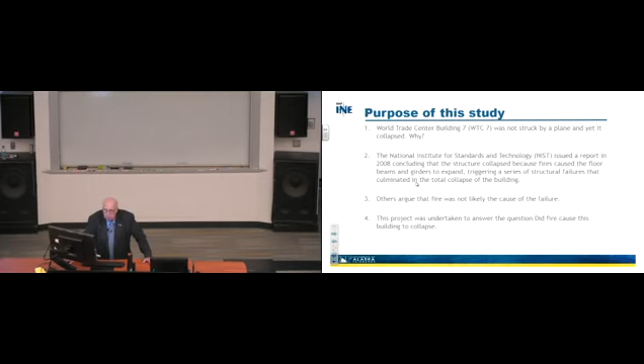More importantly, I want to let you know that since it's a progress report, this is not a traditional slideshow where I have just bullet points. There's some here where I have quite a bit of prose. And the idea is that this will go out and be available for you to read additional information if you so choose. We're going to be transparent. We welcome any questions. We're making everything that we have done available so that we make sure that everything is scientifically tested. So we'll have a peer review committee to make sure that we've met all those standards.

The methodology. Today, I want to share that with you. We assembled first the available documents, erection drawings, etc. that were available for this building. Traditionally, I would have liked to have had the opportunity to go in and pick up all the pieces of the puzzle and put it back together like you would a typical airplane. They did not exist. It wasn't available. So we've done the best we can with all the available documents, and basically what we did is create an AutoCAD drawing that we used to create a virtual geometry of this 47-story building. Basically, in digital form, you should be able to see every piece, every member, and it should look exactly like what was used in that structure. And so that's what we did.

We then prepared an Abaqus nonlinear computer model for the connections and for the framing of this building. That is a fairly sophisticated finite element program that enables you to look in detail at how something is going to respond under a set of conditions. I know that I have a mixed audience here. I'll try to keep it as simple as I can. At the same time, I need to share with you some pieces of complexity so those in the technical arena have an appreciation for the fact that they did look at this in a fairly sophisticated way. There's several things here that I haven't talked about. We have SAP2000, the current edition, version 18, and Abaqus, and we use that to look at the framing.

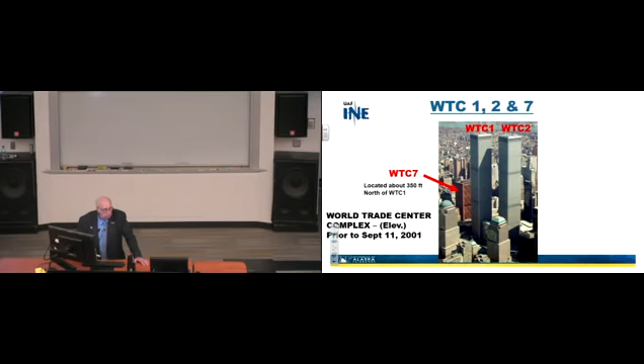In plan view, to give you a different perspective, here's the north arrow. So the northeast corner is where we're going to spend our life in the next hour, in that northeast corner. That's the farthest way from that arrow of that building. That's plan view. This study is really about why it came down. This building was not struck by a plane, yet it collapsed. That's almost an overwhelming thought if you stop to think about it for a moment.

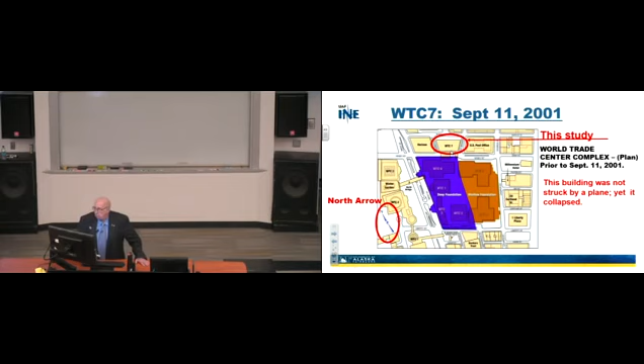If we're looking at it from an elevation view and try to take a look at the various sides of this building and what it may have looked like, here's the north elevation. When I talk about the north elevation, I'm really talking about this elevation here, the width. Notice that it's wider trapezoidally than this south elevation. So the building is not symmetric, for God's sake. There's all kinds of issues, but this makes it really interesting. So here's that width. Here is the south. Notice it's not as wide. And then here is the west elevation and the east elevation.

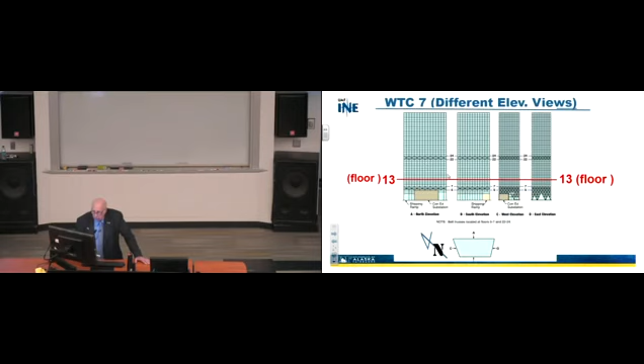Now within that context, here's floor 13, because we're going to spend a lot of time there, so you'll have some understanding of what the heck's going on in that area. Here are these perimeter trusses I was telling you about. That's at floor 5 and 7 and 24 and 22. Those trusses are resisting lateral loads. And in the plan view, you see A, C, D, and so forth. Down below here is the Con Edison substation, shipping, all the things going on down there. So that's what it's built on. That's what we're dealing with. Way more complex than that. That's the perimeter view, not the internal view.

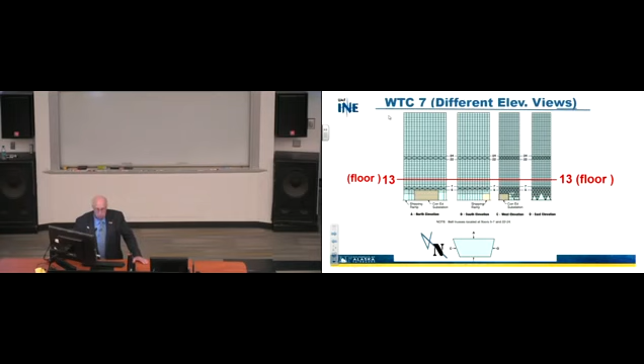Oh my God, here's the internal view. All of a sudden, we see that there's a plan view, there's frame, there's structural systems everywhere. These little hexagons are the columns, supporting vertical loads. These other things are either girders or beams. The main core carrying members, like this right here, that's a girder. These things framing into it are beams. So this girder is A2001 we're going to talk about. We're going to talk about girder A2002. This is column 79, where we're going to spend quite a bit of time this afternoon.

This is a beam on the exterior, G3005, and it's important because it has to do with the lateral bracing of this whole system. I turned these things into circles because they could have been hexagons, but I wanted to bring them out so we could pay attention to them. That's column 44, column 79, column 80, and column 81, and then column 76. So our life in plan view is going to be in that area.

Because column 79, just to give you a snapshot of where we're heading, is basically what they said failed to bring this building down. So we're going to go there and take a look at it, and we're going to look at it intensively.

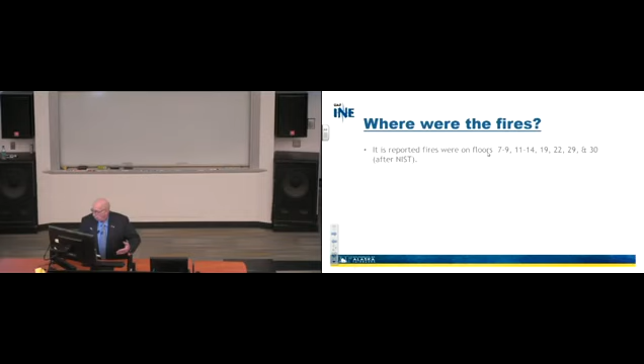So what were these crazy fires? I should have had a slide in here, I suppose. I thought I did. They started about when World Trade Center 1 and 2 actually got hit. That's in the morning. And then later in the afternoon, World Trade Center 7 came down, hours later. And they had fires that were reported having come from World Trade Center 1, coming through the windows and so forth.

And they were on floors 7 to 9, 11 to 14, 19, 22, 29, and 30. And this is after the NIST report, where they reported those fires. 1 hour before collapse, it's reported that there weren't any fires on floors 3, 5, and 7. So there were fires up in here. You have to ask yourself a lot of questions, and we don't always have answers.

Okay, so where's the combustibility? This is a steel structure. So what actually was going on in this building? And we'll get there shortly. Okay, so did WTC 7 collapse from fires? Our study shows the fire was not the cause. Now, I'm not going to tell you about what did it. I'm just going to tell you that it wasn't that.

What I am going to do, maybe not today so much, but a little bit later, when we look at the progressive collapse, is tell you what had to happen for this thing to come down. Okay, that we will be able to tell you. This contradicts findings presented by NIST. Our presentation will address this issue. We will discuss the NIST approach and our approach and findings.

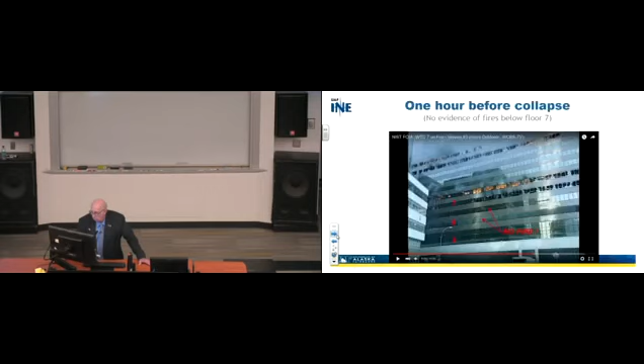The beams didn't get that hot. When we take a look at the beams, they reach 500 degrees C, and the column temperatures only reach 300 degrees C. That's significant, because there's a point where the steel begins to decrease in strength and modulus when you reach a certain elevated temperature. So the first thing I would have thought is, the columns obviously got really hot, lost strength, and we would have ended up losing the building.

Nobody seems to think that ever happened. Furthermore, there weren't a lot of combustibles in there. So no east exterior wall deformation occurred due to expansion of beams. That's their assumption. In K3004, C3004, and so on.

Where's that at? Just to kind of give you a heads up on what I'm talking about, that's along this line. Okay? Those are the lines of these beams right here. You see these beams? They're going into these girders. They're framing in. Am I making myself clear? So in plan view, I've got a beam going from this outer edge to that girder. And those are beams. And those are the numbers, 3004 and so forth, that we're talking about. Okay?

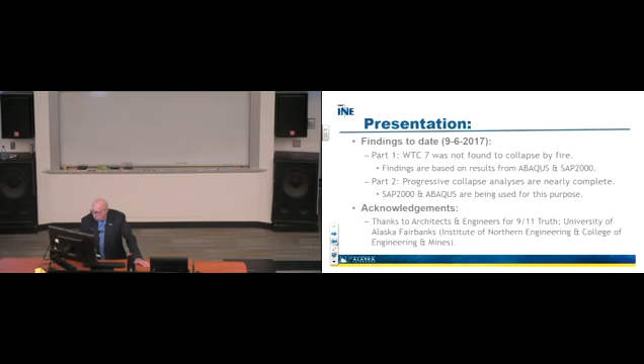The bolts fastening girder A2001 to its seat at column 44 and 79 were broken. That's significant. So let's go back here. Here's 44 and there's 79. And they're saying the connection of this girder to those columns, the seat connection, did not function during that period and therefore lost support, lateral support, and produced a problem. Okay?

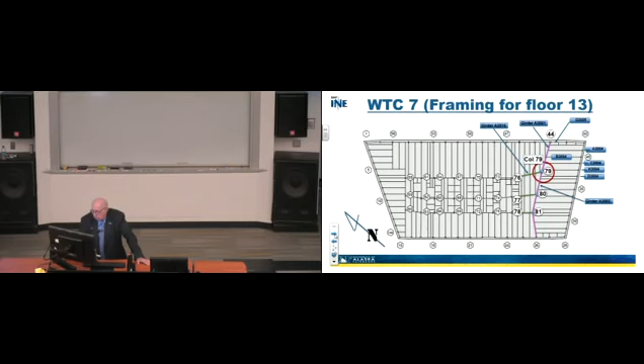So, going backwards here or something. Hang on a second. I'm going crazy. Too much fun. All right.

So they've lost those supports. So that means those two columns no longer have lateral support at that level, and did they possibly have a problem later? The floor loading was 88 pounds per square foot. The NIST computer model results were based on exterior columns being fixed in every direction. That's kind of a significant thought.

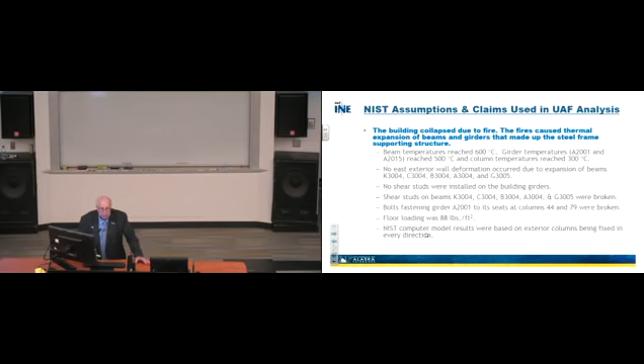All right, so now, looking at their plans, this came out of the NIST report on page 343, 2008. And so this gives you a geometry of, that's a 44-foot length from 44 to 79. 44 foot, that's a girder length. 44 foot, you know, that's longer than this, for sure. You see what I'm saying? That's not small. This is a huge building, 600 feet across. I mean, for God's sake.

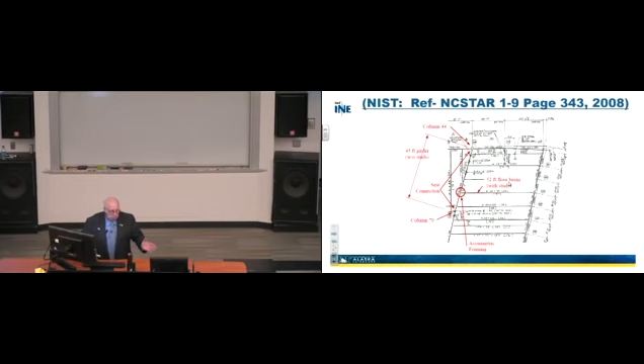So here is 50-some feet here, 54 feet across. This is our exterior wall. I'm in the northeast corner of this building. Is that clear to everybody? That here we are in that trapezoid world. Notice that there's asymmetric framing. These beams, for God's sake, are 52 feet long. That's not small. I mean, where in the world do you see that kind of stuff?

So anyway, in their view, by taking a heat model, putting fire on it and then subjecting their finite element model to an increase in temperature, they got a thermal expansion. Their thermal expansion looks like this. So that actually is this girder right here, A2001. And it expanded, and they said it pushed off of this bearing seat, and thereby they lost support. And then these cascaded downward, okay?

So that's basically what we're talking about here. There's that girder I'm talking about. There's that exterior. And here are lateral supports for this beam system through here. So what were their conclusions? First of all, fire-induced weakening of critical columns did not cause WTC7 to collapse. Okay, didn't get hot enough. They're saying that 300 degrees is not hot enough.

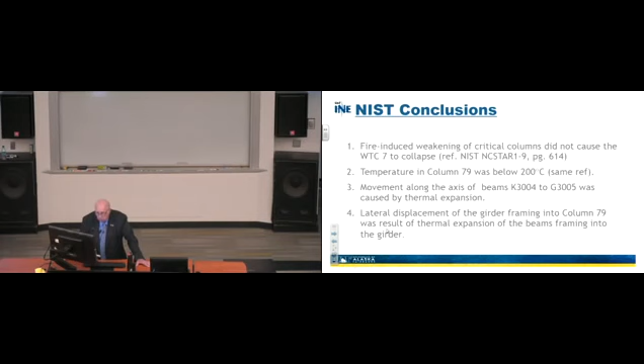No argument. Temperature in column 79 was below 200 degrees C. I think that's true. I might have to look that up as a reference again, but I'm pretty sure that's about what it was. Movement along the axes of beams K3004 to G3005 was caused by thermal expansion. Then the lateral displacement of the girder framing into column 79 was a result of thermal expansion of the beams framing into the girder.

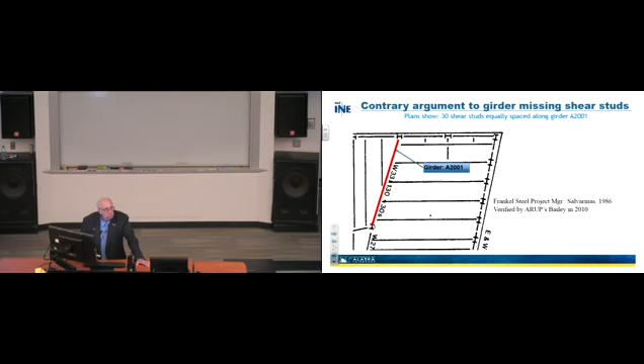All we're saying here is when these heated up, they got longer. This was fixed, so they're all going to move to the left. That means they move what direction? West. And in moving so far west, what happens? Well, they're going to try to move, and is there enough space to hold them in place? That's what their argument is, right? That's the key right there. And that's what it looked like. Bang, bang, bang, bang, right? This thing bowed outward. And so this moved and that moved.

Okay, this is the cascade issue that they said. So the buckling initiated here at this place right here, at floor 9. And then all these issues mean that they lost lateral support of that column. This is column 79, by the way, the one I'm talking about, the one we've been focusing on.

That column 79, okay, so it doesn't have any lateral support, and because of that length, it cannot take nearly as much load as it was designed for. And so consequently, the vertical support and lateral restraint is in the north only, and so therefore there's a huge problem.

And then there's full lateral support up here, and then there's partial lateral support down below. Okay, so that's down here at the very bottom in the kind of Edison area. Those are all laterally supported. But between this zone, they said, it went away.

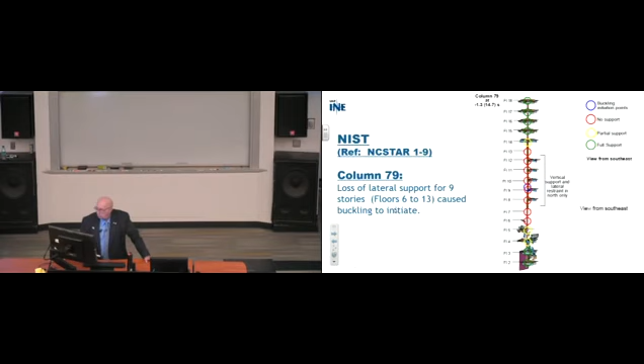So the loss of lateral support for 9 stories, floors 6 to 13, caused buckling to initiate, which means you lost it. Okay, is that clear? Everybody clear about what I'm saying here?

Okay, now let's take a look at their model for a moment. Their model is, this is looking at a partial of that trapezoid. Down here, partial, we're seeing a partial of it. This is the northeast corner. There's column 79. And in that blue, it's kind of significant.

That blue is where they put, at every place a beam and a girder come together, a column to girder goes together, a beam to all these kind of things, there's a connection that's on the drawings that says, here's how you will build it. You bolt it together, you make it do whatever you want it to do, and that's the way it was supposed to be built.

Remember that the north arrow is here. This is the west side. The east side is to my right. And so, and this is after NIST, the area of floor where connections were modeled on floors 8 to 14, and that's in the blue area. Over here, that wasn't done.

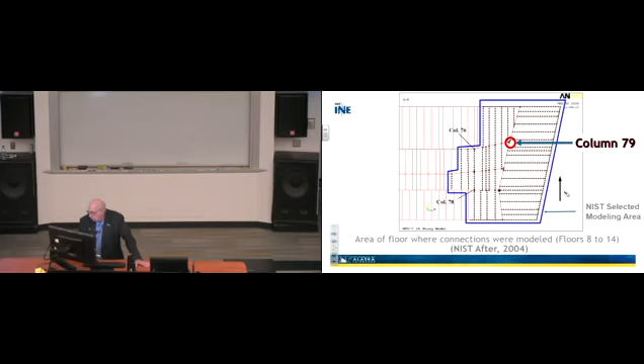So, there's column 79. Here's the area outside of the thing. And so now let's take a look. Outside the selected area, connection failures were not modeled. NIST used fixed or pin connections.

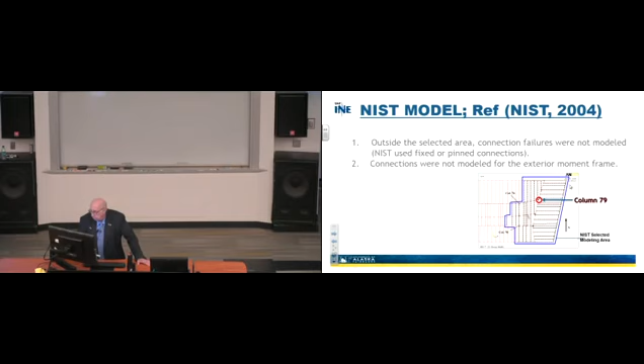So automatically, you have to ask yourself the question, do they have the same stiffness as what you were modeling here more accurately? And the corresponding question is, does it have an influence? Does it change how the system is going to respond? And so the connections were not modeled for the exterior frame, and the columns themselves were treated as fixed.

Also in the NIST documentation, page 525, 2008, a girder was considered to have lost vertical support when its web was no longer supported by the bearing seat. That means if there's loss of bearing support on A2001 coming into column 79, then it's lost. The bearing seat at column 79 was 11 inches wide. Thus, when the girder end at column 79 had been pushed laterally at least 5.5 inches, the web was no longer supported by that bearing seat.

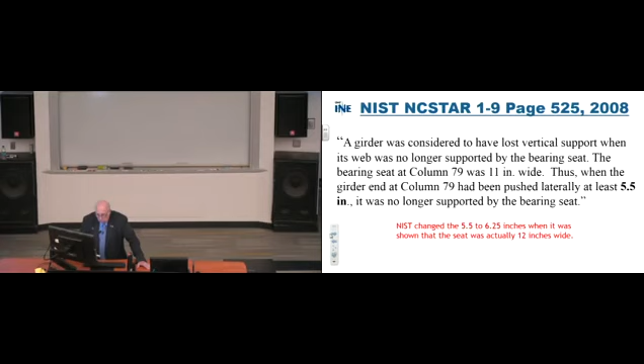NIST changed that 5.5 inches to 6.25 inches when it was showing that the seat was actually 12 inches wide. So that's kind of something to think about. Why did that happen? And that was later.

So some of the NIST results are the following. Pardon me if I'm boring you, but this is a passion for me. Let's just kind of take a look at what actually happened.

Here's the NIST model. And remember those connections, okay, so we're looking at this not from the south, we're looking at from the north, right? Isn't that right, Zilly? Or am I looking from the south? Yeah, that's the north face of the building. Yeah, exactly, north face of the building.

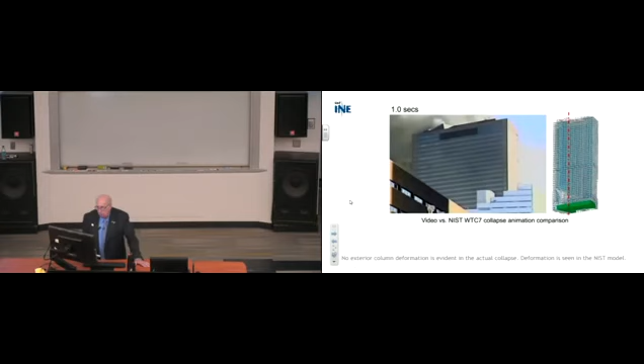So here's a penthouse up here, and here you're going to see two different situations because of the connections issue. Now let's see what this thing, and this is a real building. So here's their model. This is their progressive collapse, which I'm not going to show you ours yet. And here is this one, okay? And here is taking a look at the failure. Actually, that did occur that day.

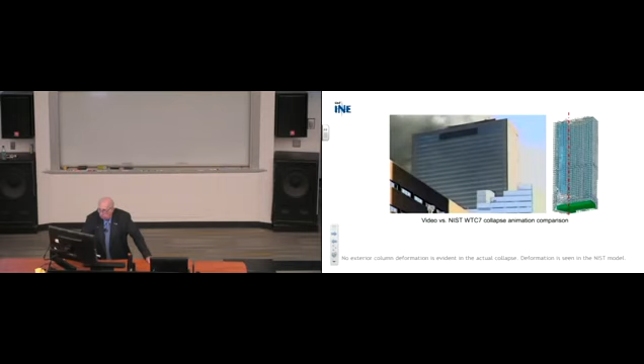So one has to ask themselves, is that the same thing? Is that the same building? It looks like it behaves in an interesting sort of way. Okay, so anyway, let's go on.

Here's the NIST model we were just looking at. And here's the other side, flipped, showing where that modeling was actually done. This is column 76, 78, and 79 is in here. So they were looking at this finite element progressive model they were using to look at that.

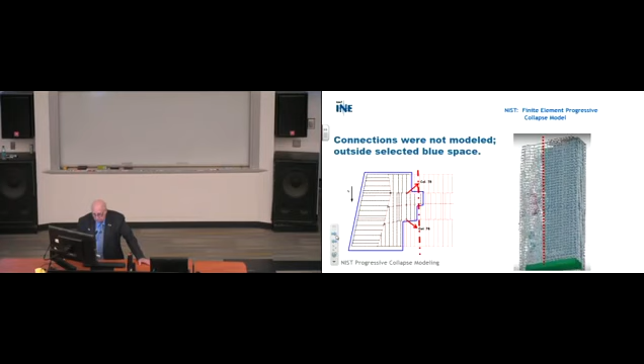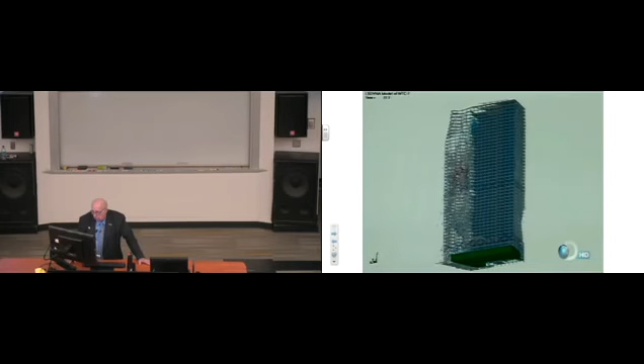I suppose we could even look at it from a different perspective. And there it is again. This is what they're doing. You have to ask yourself the question, though, why is it so much different on one side than the other? You see what I'm saying?

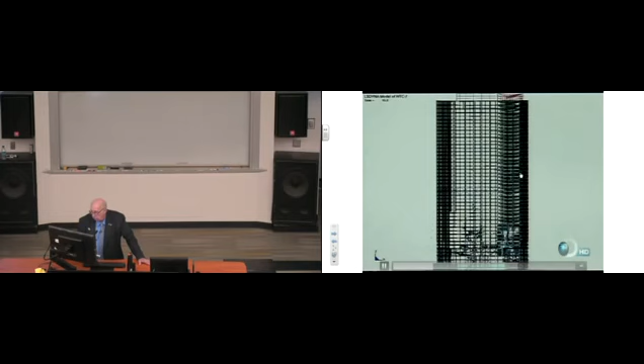And here's things that, because of some damage that came in from the debris falling through the windows and stuff, they're accounting for some of that. Anyway, all right, so let's talk about UAF for a moment.

Analysis of the NIST collapse initiation, hypothesis, and propagation claims is really what we're about to embark upon—how valid is some of this stuff from a science point of view.

So UAF's analysis of the NIST collapse initiation, hypothesis, and propagation: we created a solid model in Abaqus of the structural members in the northeast corner of the 13th floor of WTC 7, and a finite element analysis was performed to replicate the results claimed in the NIST WTC 7 report—that girder A2001 was pushed or rocked off its seats at columns 44 and 79 to initiate the collapse of the building.

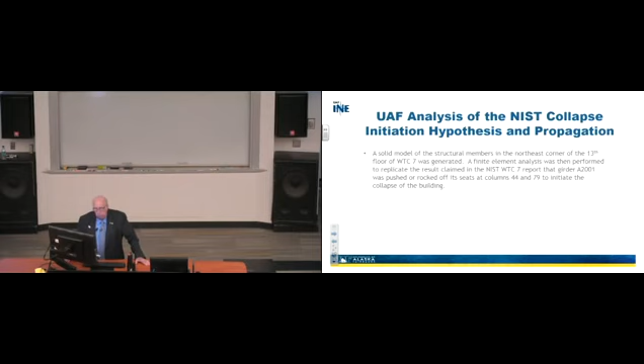So what we're going to do is create part of a finite element model, and we're going to be really conservative—we're going to force things to happen that's worse than the real world, okay? In so doing, if we can't force failure, then it couldn't have happened. Are you with me on this point?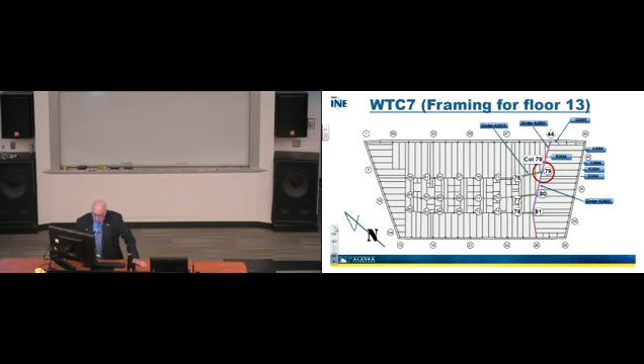And this is what that model looks like before it gets run. So we don't have the entire floor system here—we do, by the way, have the entire floor system, but for this analysis, to evaluate what's going on right here at column 79, that girder, this condition, we need to look at the boundary conditions to force that condition to be absolutely the worst possible.

Okay, we did that. So this is the beginning—you'll notice everything's zero, the stresses are all zero, we haven't put the temperature on it yet. Okay, this is the column that we're talking about.

This column 79—this is really significant, by the way, because column 79, if you look at it, do you know what I'm talking about when I say a W shape? A W shape looks like an H, and that's what we're looking at right here. That's what that column was made out of.

It's a W14 by 730 standard structural shape. What that means is it's 14 inches deep, weighs 730 pounds per lineal foot. That's a chunk of change.

Now within that context, what they did is they built side plates on it, and they closed that box. They closed it so it has structural integrity, resisting twist—significant. But those edges, those 2 inches by 26 inches buildup, mean there's a lip on each side of this, and they're going to literally put on that flange the bearing plate.

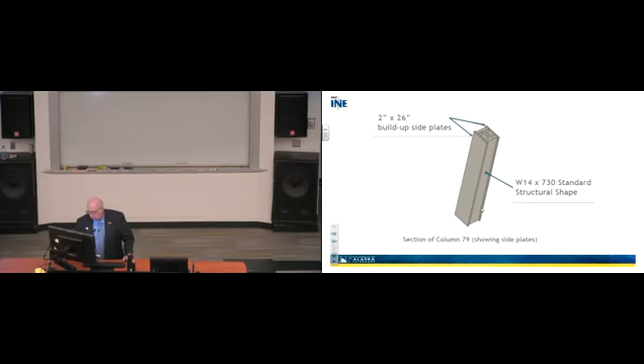Okay, are you following me? We're going to turn—that column stays vertical, but we're going to put a bearing plate in here. Okay, so there's what it starts looking like. We're looking at it right now—plan view, A2001, going over to 44, and there's a connection to column 79.

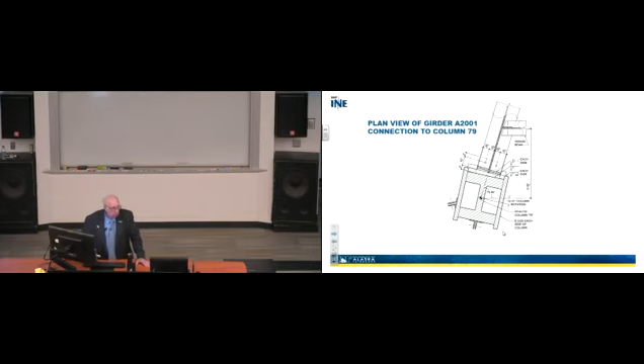And see that lip right here? Those lips? Okay, got it? Understand? So if this thing starts moving, and it's getting shoved—if it's getting shoved to the west, which is to my left, probably your left too—then it can't get past that thing, unless something happens or breaks, right? Does that make sense?

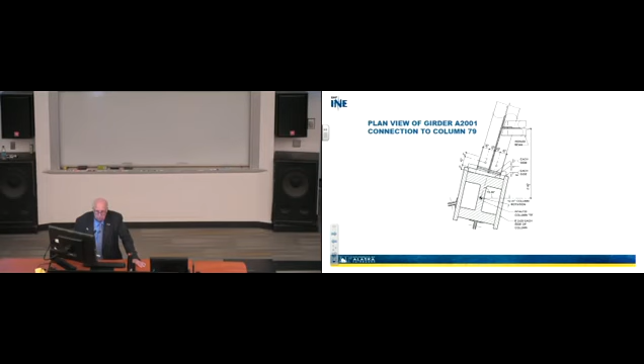And there it gets shoved. So the plan view of A2001 moving across its bearing seat at column 79 due to thermal expansion of the beams framing into the girder from the east is here, and it gets shoved. Note that picture illustrates that A2001 is trapped by that column side plate, and it's not possible for it to move the girder beyond the seat claimed by NIST.

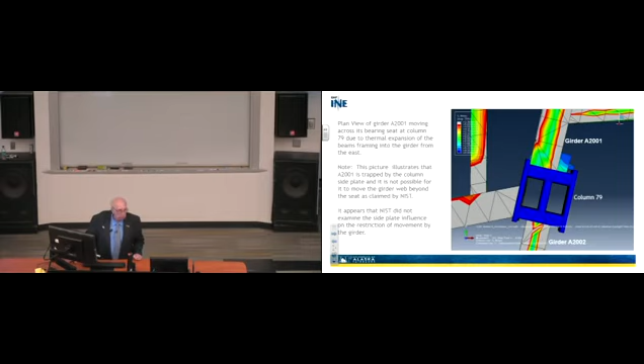They're saying it got shoved off and it fell down. The fact of the matter is they didn't have the side plates on it. They weren't there in their model, so they wouldn't have found that. But yet they did exist in the structure, in reality. It appears that NIST did not examine the side plate influence on the restriction of movement by that girder.

Okay, so now let's take a look at what else we looked at. And this is just part of the puzzle, because we've been playing this game for two years, so this is just a few weeks of stuff. So the model shows the influence of the thermal expansion at the northeast corner of floor 13. Here we are. There's column 79, column 44, and there's the northeast corner. And here are the beams framing into that girder system.

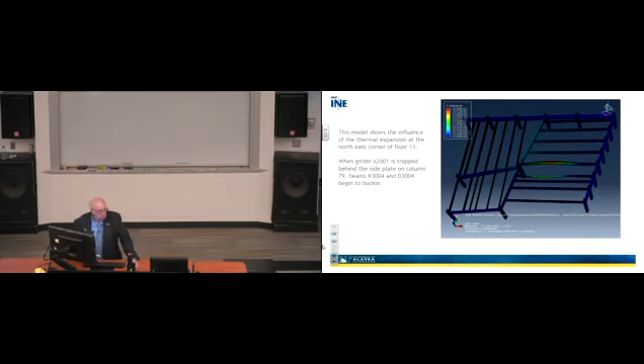So when girder A2001 is trapped behind the side plate on column 79, these beams begin to buckle. In other words, they can't go in here. So it's heating up, it's pushing, and they can't stand the amount of load axially that's been imposed upon it. And so they begin to try to displace out of the way and relieve their states of stress. Are you following what I'm saying here?

So fundamentally, that happens. This is out of the NIST WTC 7 report, figure 8-22, which is showing basically concrete slab, metal deck, all that kind of stuff. Exterior columns out here, and this is basically column 79, column 44, how that column is, and the girder here, and so forth, okay?

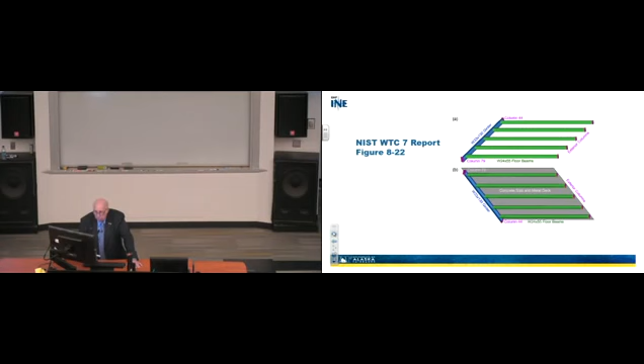And here's what begins to happen on the exterior columns according to their stuff, okay? And so they did not have those side plates in there.

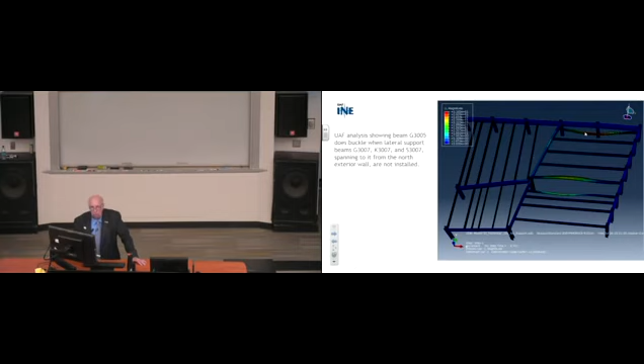So that means that something could happen, and there it is. So UAF analysis showing beam G3005 does buckle when lateral support beams 3007 spanning to it from the north exterior wall are not installed. Okay? So if those are not installed, it's going to buckle.

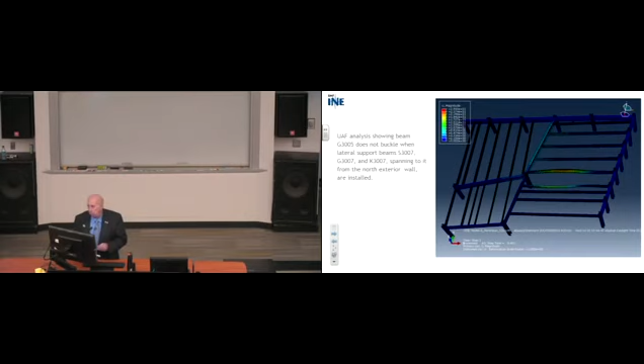So the UAF analysis also shows that that girder does not buckle when you have them in. There's a huge difference between those two thoughts and what that might mean to the behavior of this system, spanning to it from the north exterior wall as we see here, okay? So is everybody getting a mental picture of this building? You should be almost getting an intimate view of what we've been living with in this picture, okay?

Let's take a moment, take a breath of air. Section view of actual configuration of girder A2001 at column 79 from the Frankel 1985 drawing 9114, showing there's partial height stiffeners in here.

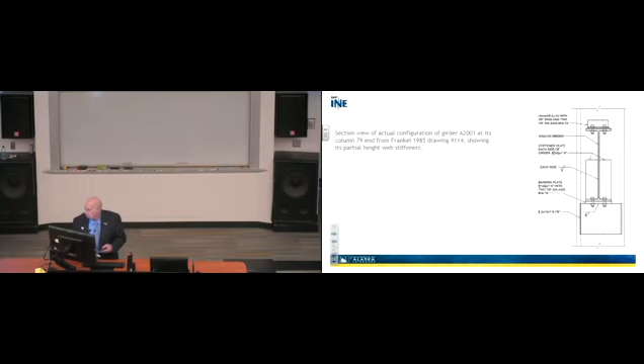Now, folks, let me just absolutely tell you, this is critical. Those stiffeners prevent this web from buckling. But more than that, it prevents these flanges from getting overstressed and having a flexural problem. If they're there. If they're there. But NIST did not include them.

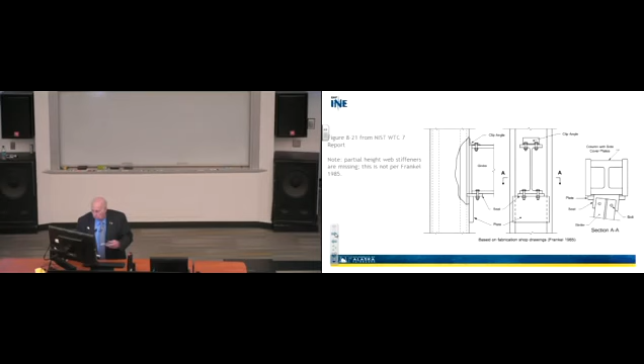So, partial height webs are missing. That means there are some issues here that literally affect the behavior of this system. So figure 8-23, finite element analysis from the NIST WTC 7 report, note partial web stiffeners are missing.

So the behavior of this interaction between column 79, A2001, column 44, the beams to the girder, the moving of the girder on that bearing stiffener, I mean on the base plate.

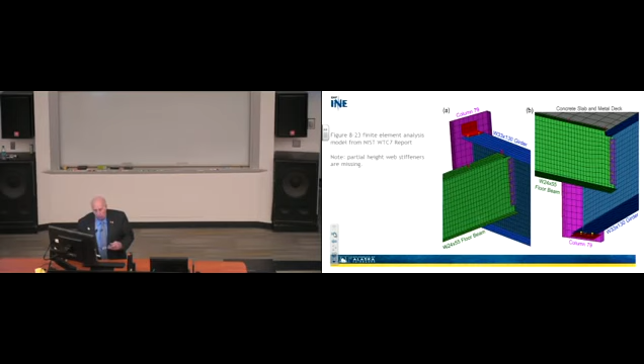Now remember, they didn't have the base. They didn't have the side plates. They didn't have the stiffeners, and all of those things are going to give you a huge added resistance to anything going on here. And in spite of that, I'm going to share with you some other things that make it quite interesting. So here we go. There's what happens if you don't have any side plates.

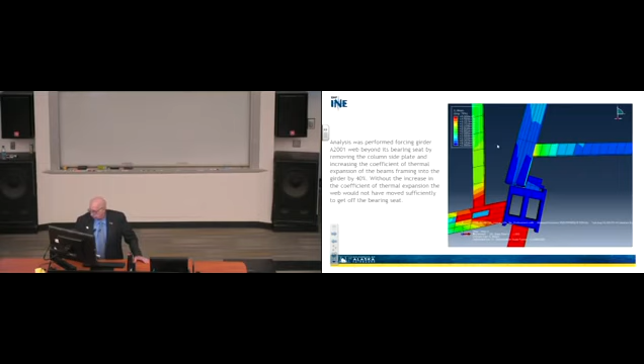So the analysis was performed forcing girder A2001 beyond its bearing seat by removing the column side plate, increasing the coefficient of thermal expansion of the beams framing into it by 40%, so we could get that kind of movement. That's not true; we did it just to see what could happen. Without the increase in the coefficient of thermal expansion, the web would not have moved sufficiently to get it off the bearing seat. We wanted to see if we could make it move. Okay? That's what we did. That's at column 79. That's A2001. Is that clear? Everybody got a mental picture of what's happening?

Well, again, this UAF analysis shows that the girder will not fail with the partial height web stiffeners installed. That small area of high stress, right here, right there, is not in the load path. That's a point of high stress, by the way. It is not in the load path, and it's due to the tip of the girder being compressed against the flange of column 79. This is not a structural concern. It's a fact that there was some overstress there, but it's not going to cause the building to come down.

So we also conducted a modal analysis showing the 52 Hertz frequency mode of the falling beam and girder assembly, which was needed to calculate the combined stiffness of the contacting structural members and the subsequent impact load on the girder below on the 12th floor. So here we are on the 13th. It falls, drops off of that base plate, drops down, beams go, girders go, concrete goes, all that stuff happens. You're going to have stiffness involved. You're going to have F equals MA involved. You're going to have those conditions, and so we looked at that.

NIST and ARUP claimed that the falling beam and girder assembly from floor 13 impacted and broke through floor 12 in an 8-floor cascade. Okay, so based on the natural frequency, the stiffness of the beams can be calculated and the amount of deflection under load can be examined. This establishes whether the phenomena could actually physically occur.

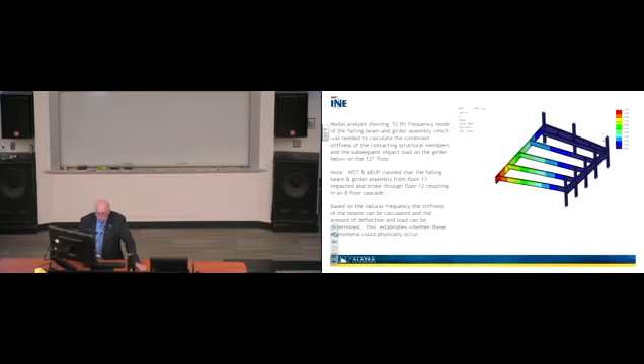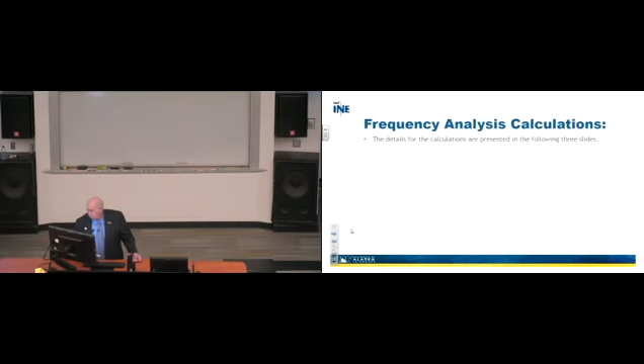I want to just share with you, I'm not going to spend any time on it, but those calculations are in the following pages, okay? So we did that to examine that issue, and that's where they are. You can go, at night while you're relaxing, you can read these. But I'm not going to read them for you. So anyway,

we had this 215,211 pound impact force, which is only 34% of the 632,000 force required, and thus insufficient to shear the girder bearing seat welds, and the southeast corner floor 12 would not have collapsed if a girder at floor 13 came off its seat. That's basically what we're saying. Thus, the ARUP analysis did not show a basis for propagation, even if the girder were to fall off its seat at column 79. These findings illustrate the ARUP's explanation is actually invalid.

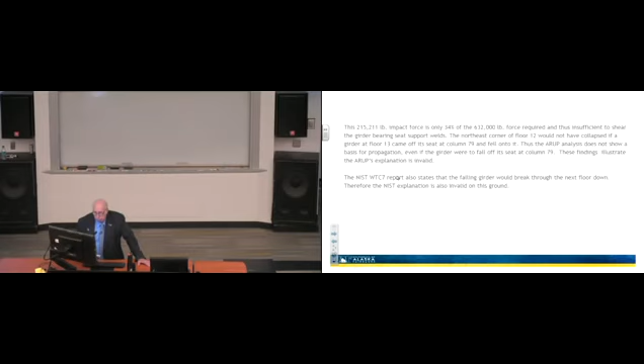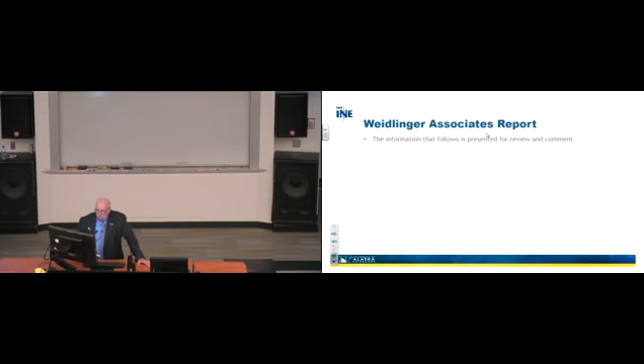That's another group, by the way. So there's more than one group involved. Weidlinger Associates report. This information is going to be presented a little following this, and so here that is, if you want to read it. I originally had a change to this, and it looks like that change didn't get made, but I broke this out. So anyway, let's talk now about our approach, which is looking at things from a different perspective.

There was a 5.5-inch movement at the girder bearing support at column 79, according to NIST. The issue that led to that 5.5-inch movement was the main girders being non-composite. Now, what do I mean by that? So you have concrete floor slabs, and you have to decide how you're going to build it. Are you going to build it with shear connectors to the flanges and make it act as a system, or are you going to leave them so that they can slide? So I looked at it both ways. I said, okay, what if it slides? What if it's so lubricated between those flanges and that concrete that there's no resistance to movement?

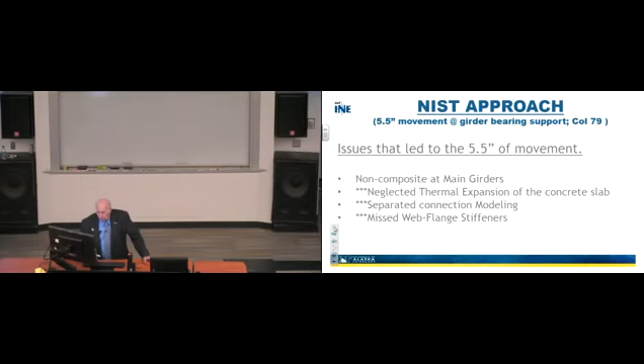What if there's friction between it? We looked at that. What if it's partially composite? What if it's totally composite? So all those, we neglected thermal expansion of the concrete slab, separated the connection modeling, missed web flange stiffeners were looked at. Okay, so all those issues are going on there.

So our approach was to say, okay, let's take a structural modeling and look at two programs, Abaqus and SAP2000. We had established a quality control program by which we have two researchers, Zhili and Feng, each one of them doing the same thing much of the time, and challenging each other, with me there as a referee to make sure of what we got out of it, and if we didn't agree, we had dialogue. We would try to find what's going on here, what's wrong, until the point that scientifically we were able to justify every step of the way. Takes longer, but it's of value to make sure you have good stuff.

So in Abaqus, we developed nonlinear springs for structural connections. What does that mean? It means that if you have these members bolted together and things move fairly significantly, then it's probably not a linear curve. It's probably not a straight line. It's probably going to deform non-linearly, and it may never come back the way it used to be. Okay? So we looked at a nonlinear response. We looked at composite, partial composite, and non-composite. We looked at floors 12 and 13, and we looked at thermal expansion.

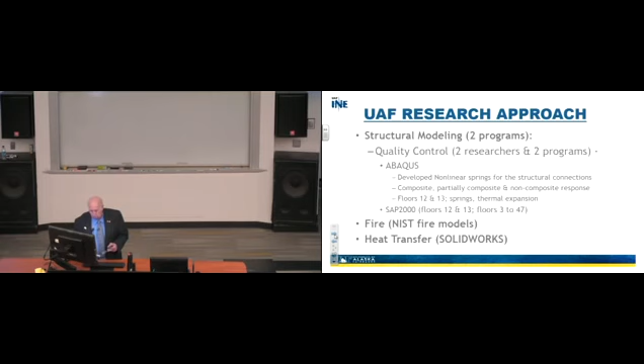In SAP2000, we looked at floors 12 and 13 again, and floors 3 to 47. Here's what we did do, though. We used the NIST fire models to look at this, and then we looked at heat transfer using SolidWorks, and we also used Abaqus to do that. The steel framing, connections, columns and beams, girders were considered throughout the entire floor, not just part of it, all of it. So nonlinear springs on all stories is something we haven't finished yet, but we've looked at. Substructuring of frames and concrete floor was used to minimize computer time.

So it's my understanding that some of these computer models were taking weeks to run. I went to a substructuring system where we could run them in less than an hour, maybe half an hour, maybe even less than that. They ran really fast because I took out all the complexities and replaced them with equivalences. And then if we wanted to know what was going on within those equivalences, we put that stuff into those. So we could save huge amounts of computer time.

Heat transfer was studied and we looked at the floor tile over the concrete with welded wire fabric, stay-in-place forms, flutes. So these were stay-in-place forms, by the way, and there's a flute. What does that mean? It means that there's a steel, I guess I don't know how to share that with you. Imagine if you take just a straight line and you drop it, a little square hole, you would say, and it's long. And so that space is a place where they don't put any concrete. It's an open space. Saves concrete, you still get strength, and that's flutes. And so the question then became fire protection versus no fire protection. What does that mean in terms of fire? Is there an issue there? So we looked at that as well.

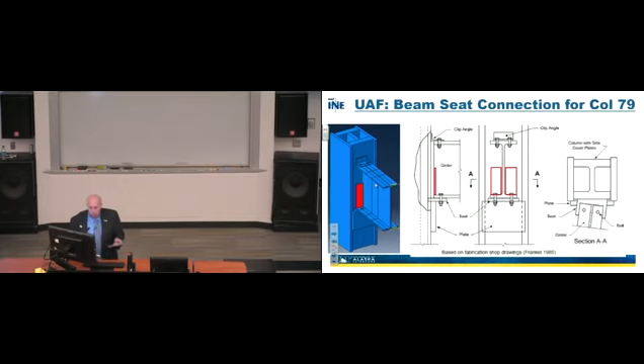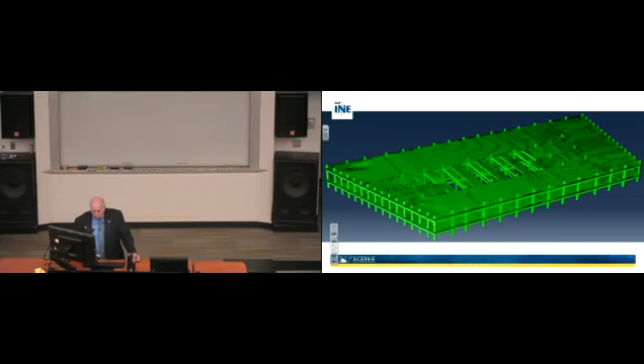Here's what that floor system actually looks like. By the way, these are elevator shafts. This over in here is column 79. There's that column, there's column 44. There's that exterior of that floor. There's that whole system. All right? That's an Abaqus model, by the way, that we're looking at.

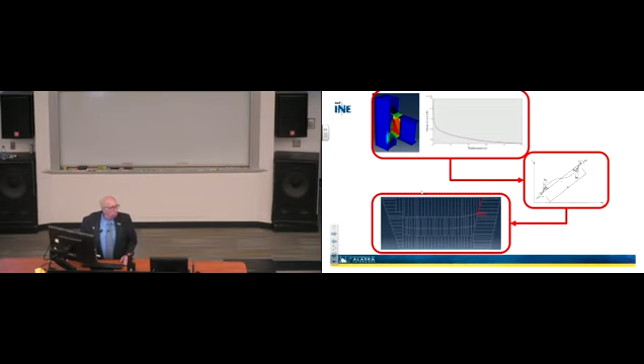UAF sample connection response. Basically, I'm taking every one of these connectors now. We've identified this and called it an STC. That's our name. STC, and what does it look like? It looks like this. That's the connection type. And we plotted the shear load versus displacement on it. So we can always go in and put that spring, wherever that's at, and get a response that will be equivalent to if we had used all of that complication there anyway. So we threw it away. That went away. We replaced it with an equivalent to save time.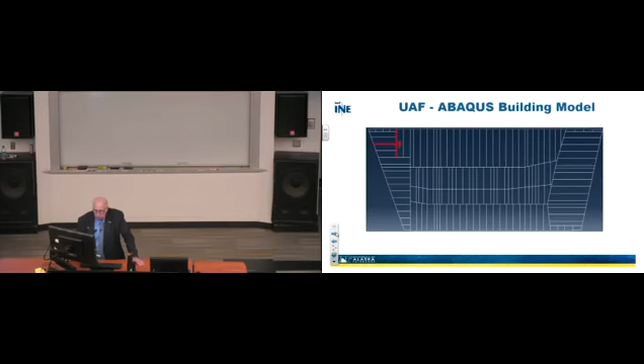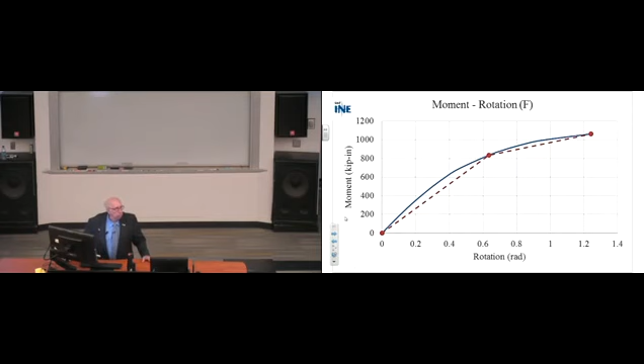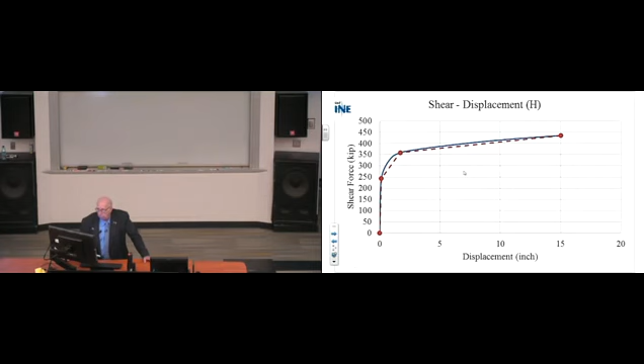Then we looked at the fin connection, same idea. I'm going to not waste your time. That's how it was put together. There's how it's actually put together mathematically. That's what it starts looking like as a behavioral system. And then we plotted a curve for it, and we got a spring system out of it. Okay? Same idea. And so forth. So there's what it begins to look like. Basically, we put a load, we plot its behavior, and from that we can then put the equivalent into it. So this is a simple model of floors 3 to 47 from Sept 2000. And that's what we're using actually to look at progressive collapses with.

So let's take a quick look at the materials that went into this thing, and I won't bore you too much, just a little bit. So the material properties, steel ASTM 572 with a yield of 50,000 psi. Thermal conductivity of the steel was 35 BTUs per hour per foot per degree Fahrenheit. Here's the thermal strain value. Density was about 490 pounds a cubic foot. We also had some ASTM 36 steels in here. I'm just not showing you all of it.

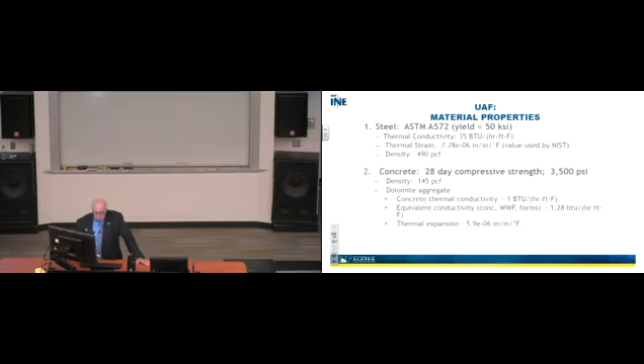Concrete's 28-day compressive strength was 3,500 psi. Density was about 145 pounds per cubic foot. Dolomite aggregate. We got a thermal conductivity from it. We got equivalent conductivity that we're going to be using here, and thermal expansion. So that's the kind of stuff that actually made up the model to simulate what we thought the building was going to be. We took and fixed the exterior column wall line here, as did NIST, and we subjected it to that heat-up model, and we got very similar result.

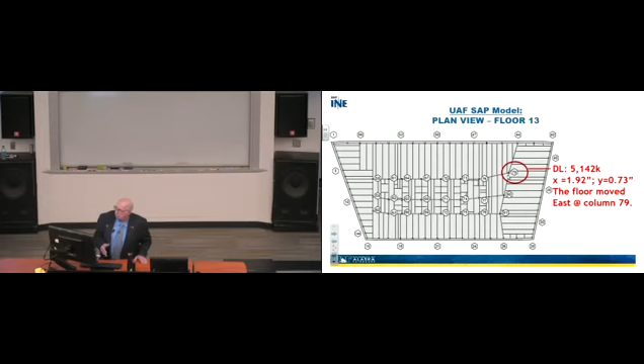Well, we didn't actually. I'm sorry. I apologize. This is not the NIST model. This is our model. Here we have the connections as they truly are, all along this system, throughout this entire floor system. How it actually was built. Then we heat it up. And by heating it up, we have a dead load here of about 5,142 kips. We have a movement of that section right there of almost 2 inches, but not west. It went east. Totally different. The floor moved east at column 79, not west. And by the way, they moved together. They didn't move separately.

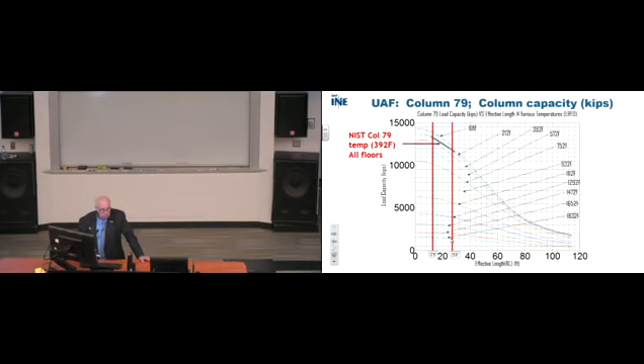So here's the material response versus temperature. Here's the column 79 column capacity curve as a function of temperature. So you can see even if you drop down into here, you don't get much change. The column 79, 392 degrees Fahrenheit. So this is load capacity versus the effective length for these various temperatures, okay? So this is 1832 degrees Fahrenheit. I think you can see it can make a huge difference in the capacity of that thing.

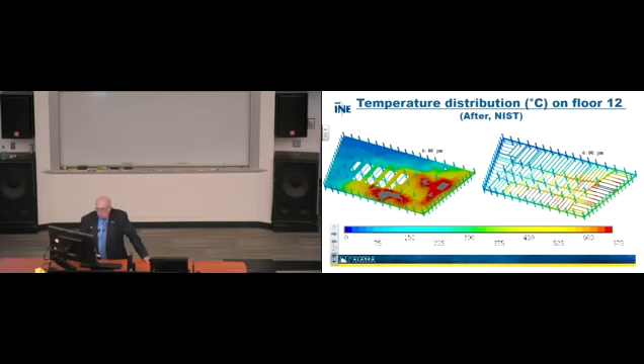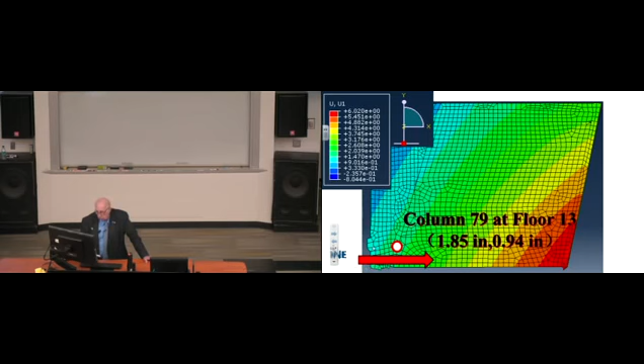This is column 79 at floor 13, 1.85 inches to the right. That means east, that doesn't mean west. So this whole thing moved. I'll show you a different picture here, hopefully in a moment. So this is all this stuff to the east of this.

So you can begin to see the displacements. If you start looking at minus 0.50, in other words, where's the zero at? It's over here somewhere. So here's column 79. So it's moving with respect to this over in this area. It's not moving with respect to this. It's not moving with respect to that.

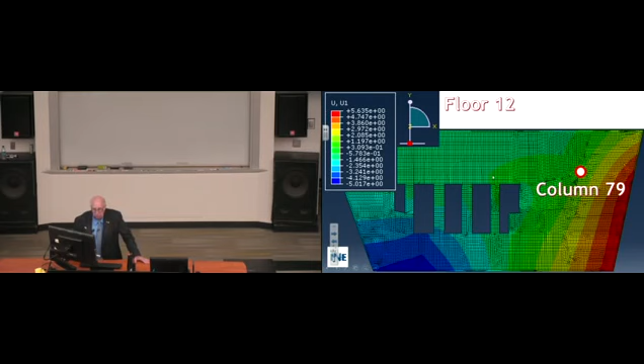It's moving this way and that way with respect to what we call the thermal centroid, which is your stiffer point. So basically you've got a center of stiffness by which this thing is behaving. And that's what's happening here.

So notice that our results in the SAP model, column 79, show that we have 1.92 inches to the right. This is SAP; 1.85 in Abaqus. We did it two different ways and got very close to the same answers. And then NIST is 5.5 inches to the left, revised to 6.2 inches. And why? Because of some of the things I was telling you. Understand? In my view.

So let's do a little comparative game. Floor framing, steel connections: UAF accounted for them, NIST partially. We have exterior steel framing connections included as springs. They did not. Exterior steel, I'm talking about the exterior walls. They have them fixed, remember? Girder to column stiffener plates at column 79.

Yes, no. What about the floor composite with beams and not girders? Both of us considered that. Composite with beams and girders: yes, but they did not. Thermal expansion of the concrete deck: yes, but they did not. Thermal conductivity and expansion of material properties.

So what I did is I went back and got the aggregate, then I changed it. I made sure that we knew what the thermal conductivity of the concrete would be and the thermal expansion of that material if they actually made the concrete, matched to the aggregate type. And so we accounted for that, they did not. Thermal horizontal movement at column 79 was less than 2 inches.

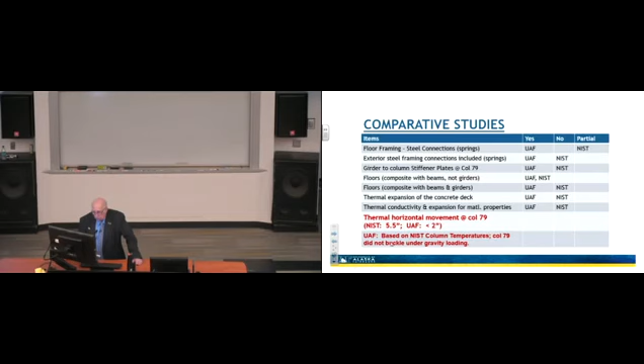Therefore, based on our analysis, column 79 temperatures were such that it did not buckle under gravity loading. Couldn't have happened. So did Building 7 collapse from fires? No. This is based on our calcs. This contradicts the findings by the National Institute of Standards and Technology, the NIST approach.

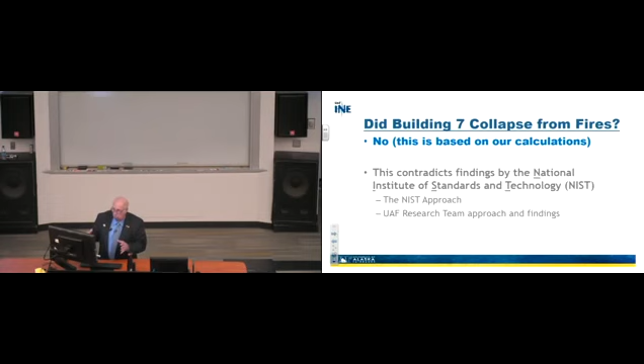So that was what I view to be the real way it actually behaved, not what you assume, not what you do in terms of boundary conditions, making things perhaps easier for yourself or whatever. So the concrete floor diaphragm stiffness is significant, even with no shear connectors. Frictional resistance to thermal expansion is not trivial.

We noticed that if you take those shear connectors out, since they argue that they're not there, take them out, I don't care. When they go away, I have enough friction and enough shear connectors on the beams that it doesn't matter. It's not going to make a difference. So that's what we determined, and we looked at it both ways.

The thermal expansion of the concrete deck cannot be ignored, and it's likely less than the steel. The value is highly dependent on the type of aggregate. My research shows that you can have thermal expansion of concrete as low as 2 all the way to 12, whereas steel is about 6.5, depending on the aggregate. So we had dolomite aggregate, and so we matched to whatever we had there.

The research team evaluated fire by considering airspace below the beams, in the space between the drop ceiling and the structural steel framing. We did that because a number of people felt like it was important. The result is that the fire underneath will likely burn through the drop ceiling quickly, and its resistance to heat transfer is likely not available to help.

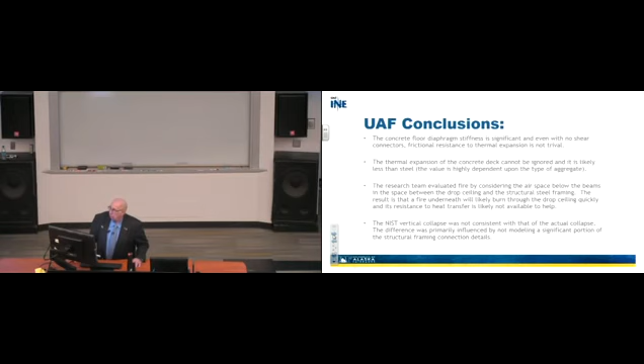So the NIST vertical collapse was not consistent with that of the actual. The difference was primarily influenced by not modeling a significant portion of the structural framing connection details. There may be other issues, but certainly that had an effect. There's no doubt about that.

What's new? What's next? Well, we welcome your input. We welcome input from the world. We want to make sure that our findings are based on scientific fact, and if there's a question, we're there to try to answer that and to make sure that our results are true and of value.

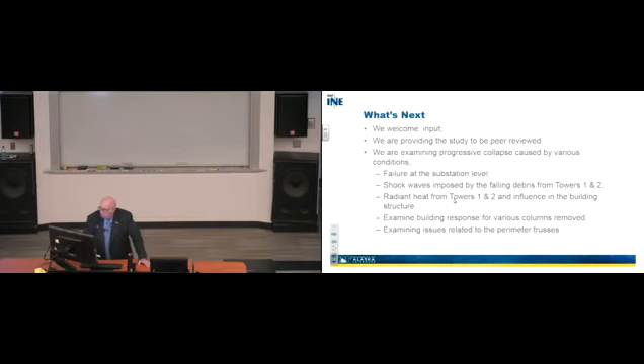We're providing the study to be peer reviewed. We are examining progressive collapse caused by various conditions, such as failure at the substation level, shock waves imposed by the falling debris from towers 1 and 2. What about the radiant heat that actually was imposed on that building structure by towers 1 and 2 when they heated up under the planes?

I'm interested in examining the building response for various columns being removed. We've already removed the inner core. I'm not sharing that with you, but it's very impressive what's going on. So then the question is what else is going on? And we're examining issues related to the perimeter trusses. There's been a lot of questions about what if they had a problem? What would that mean to this structure? So

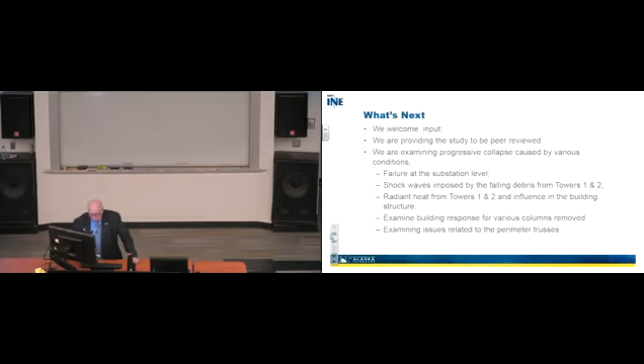I think, folks, that I'm done. Thank you. We'll take some questions.

Yes, please. You mentioned that NIST did not model, for instance, the partial stiffeners and some of the shear connectors. Was there a reasoning? Did they not find that in the wreckage and they don't think it was actually on the building? Or did they do that to make it easier to do the modeling?

I don't know the answer to that. I think it was an oversight. You know, I don't know how they got to that level, but I think it was an oversight. And so I'm not here to criticize, I'm simply here to make sure that we did it the way the building was built. You know, try to answer that question as best we can.

Yeah. For the people online, I should probably give you the microphone.

Yeah, I guess I'm still a little bit unsure. When you said NIST revised their figure, they added an additional 3/4 of an inch or so of expansion. Maybe I missed it, but what exactly did they cite for revising that figure? Like, what was the variable they introduced that said, oh, hey, we were wrong, there was an extra 3/4 of expansion? I'm not sure I know the answer to that either.